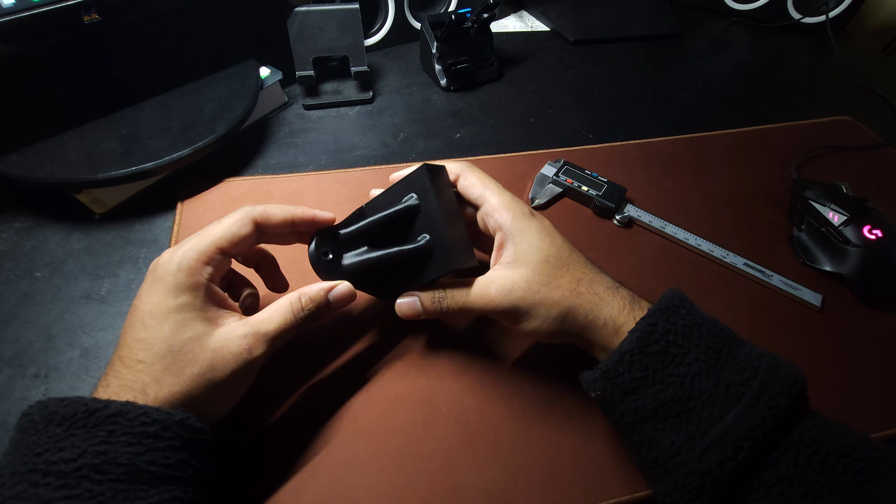Today I'm going to use Fusion 360 and Generative Design to make a really cool part, but a functional part, to hang my PS4 up on the wall since I'm getting back into story games again.

Because after I found out I was trash at OG Fortnite. Alright, I hope you guys really enjoyed that.

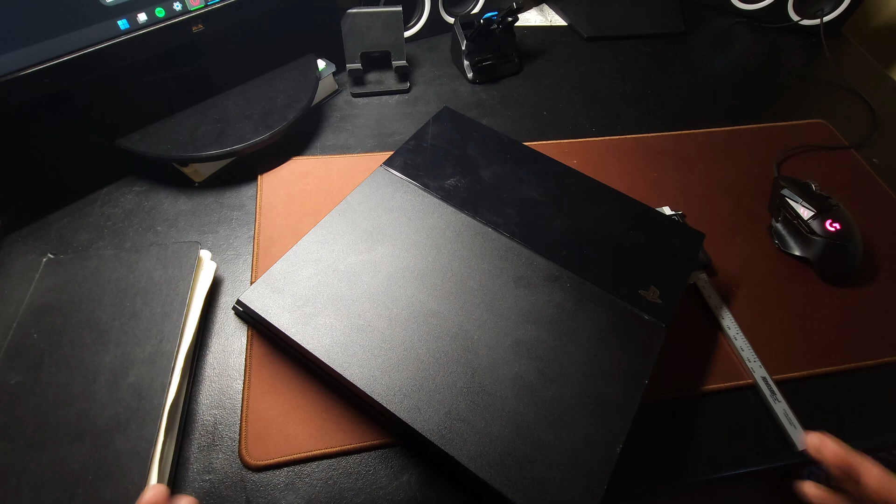Now let's dive in. Now when it comes to creating a part that depends on the features of another part, you're going to start by taking some measurements. That's going to be the most important part. So I highly recommend you guys take your time on this part, because if something fails, you're going to have to reprint stuff and you'll have to account for tolerances.

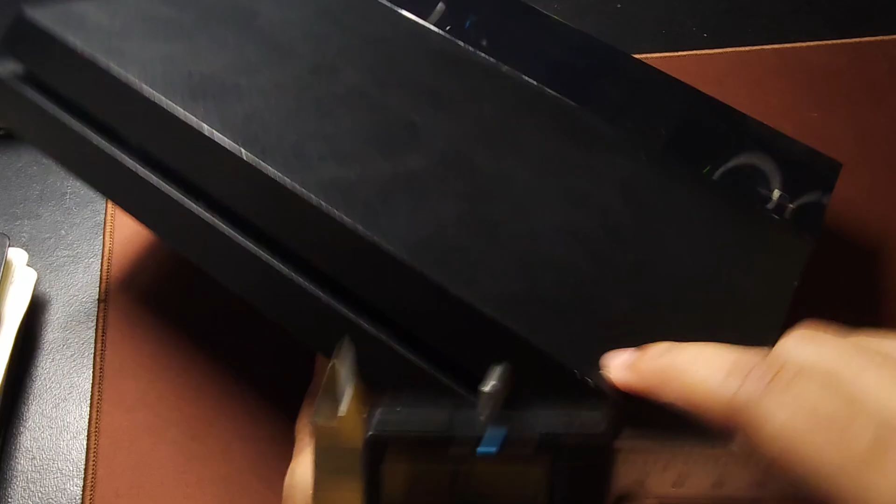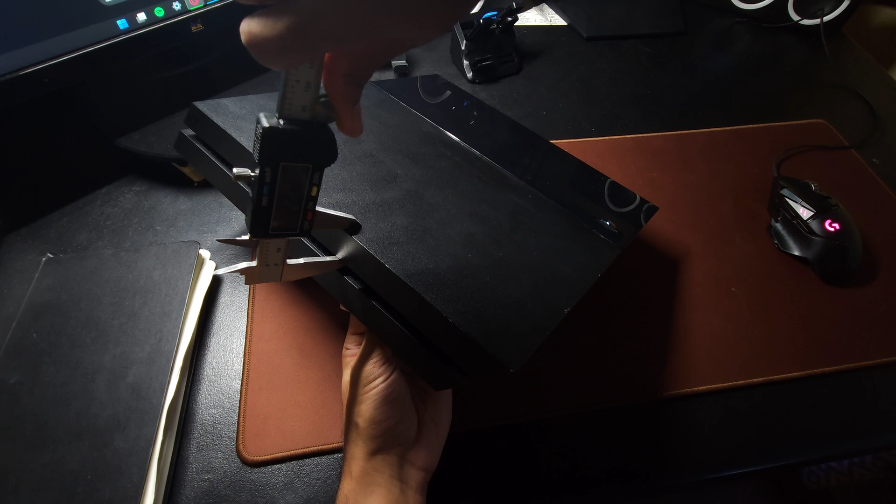So here's where I want my PS4 to be held on the wall, the slit over here. And we're going to start by taking the measurements of that with my calipers. Make sure you get a decently loose enough fit, not something that's like rock hard, but something that can slide in and out. So we got about 23.25.

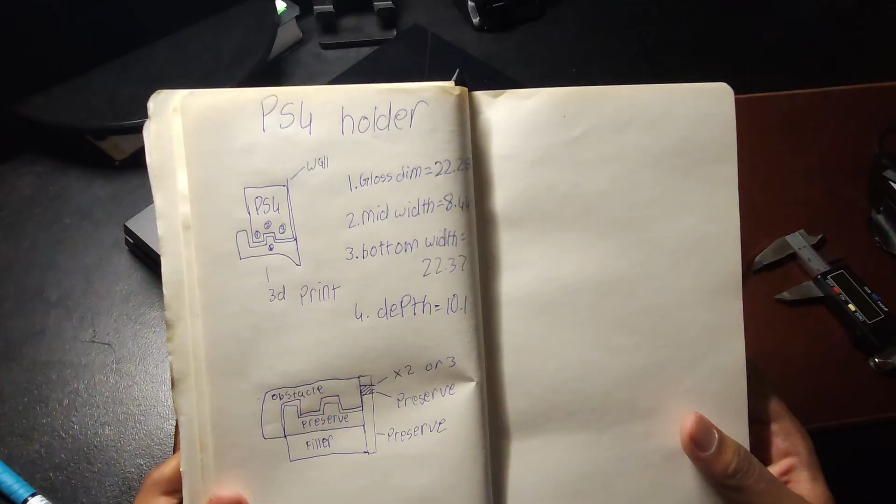The next thing you want to do is write down all of that in a book. Now I have written down all mine on my book already. Here's what I got. I got the 3 features of the PS4. So the upper area, the lower area, and the slot. Then you kind of plan out your features and how you want to do it.

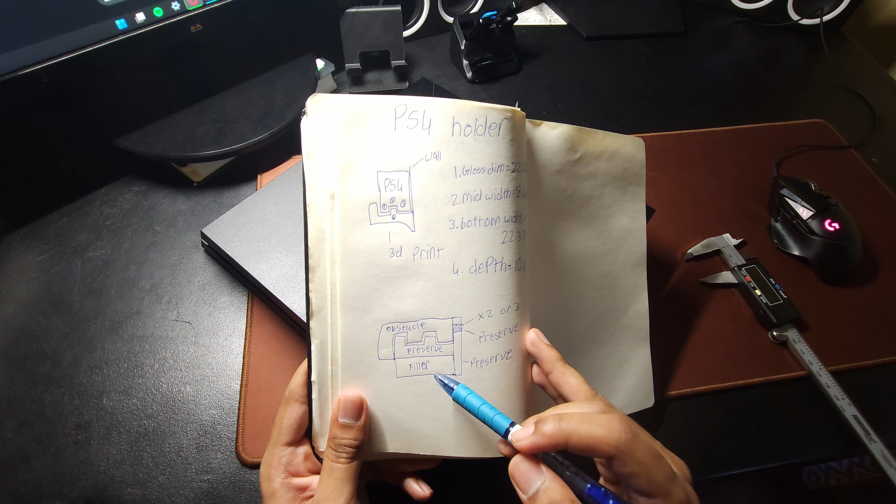For generative design, here's how I did it. We're going to create a preserved geometry here with our essential dimensions. And then we're going to create a filler geometry, which the generative design algorithm will then edit out to turn into the rib we want to make.

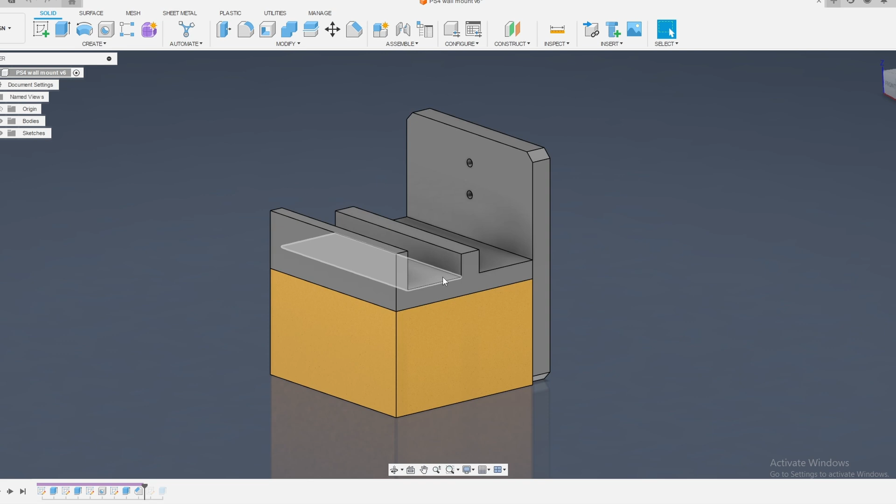Alright, so now we're in Fusion 360. What I've gone ahead and done here is created our backplate, and that contains our mounting holes and the rail, which contains all our essential measurements. So now basically I've created a functional component, but now we have this big block here, and I'll explain more about this later once we get to the generative design tab.

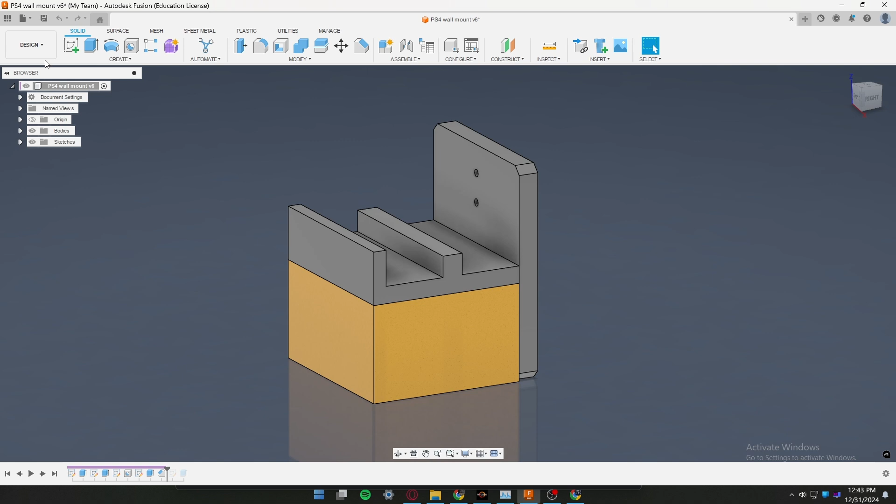But for now, I want you to think the point of generative design is that you go ahead and create the component in its bare bones with just the effective dimensions and the functionality of the part. And once that's done, we can go into generative design. Now you have 2 options here. You have the fluid path or the structural component, and we're going to be working with structural today.

If you've never been here, these new icons might be overwhelming, but Fusion's made it really easy by helping you work from left to right. So you guys can learn more about this tab over here or other YouTube tutorials. But here's a quick overview on what I did. We're going to start with preserve geometry.

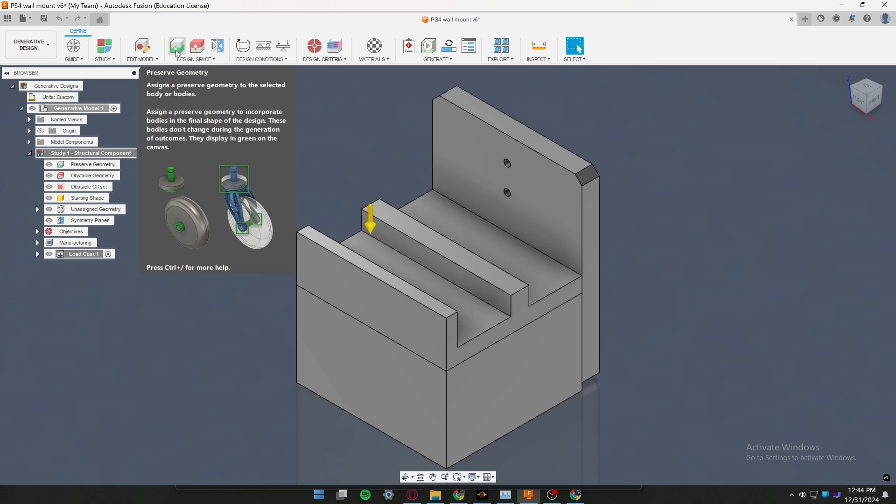Preserve geometry essentially means geometry that has to be preserved. Yeah, no shit, Sherlock. For example, here's our essential geometry that is necessary for the part to function, which is this rail and the back plate. So these 2 will not be modified during the design.

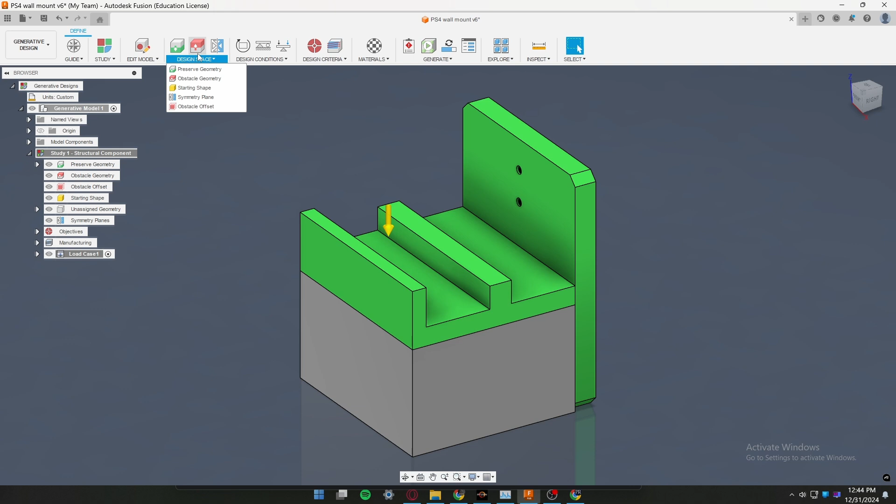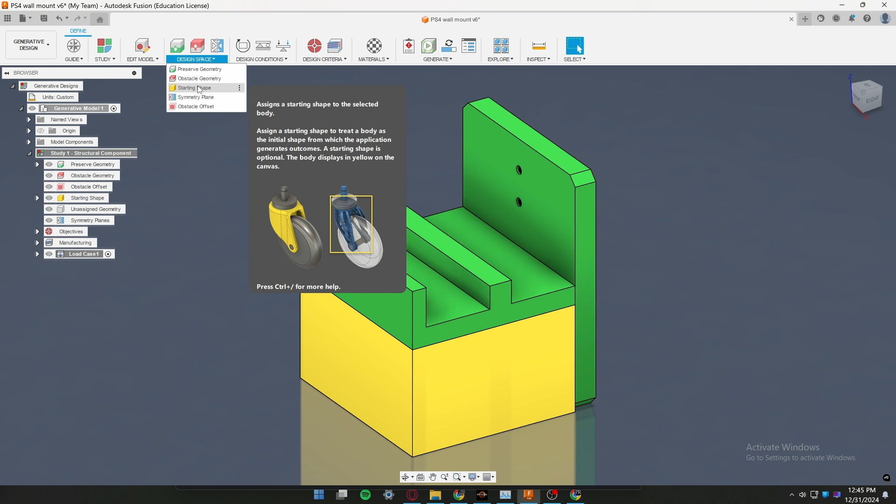So we give Fusion a starting shape, and Fusion can modify that starting shape based on the load case that is given. So over here, you'll see once we define our load case, Fusion's going to take that yellow box that we have and shrink it and modify it into the best organic shape that can support the load that's going to be sitting on our bracket.

This is going to save you a lot of time where you'd have to make this design manually, print it, put your PS4 on it, have it fall down on your head, and then go make another one that's maybe a bit stronger, or you overbuild it and you waste material on a component.

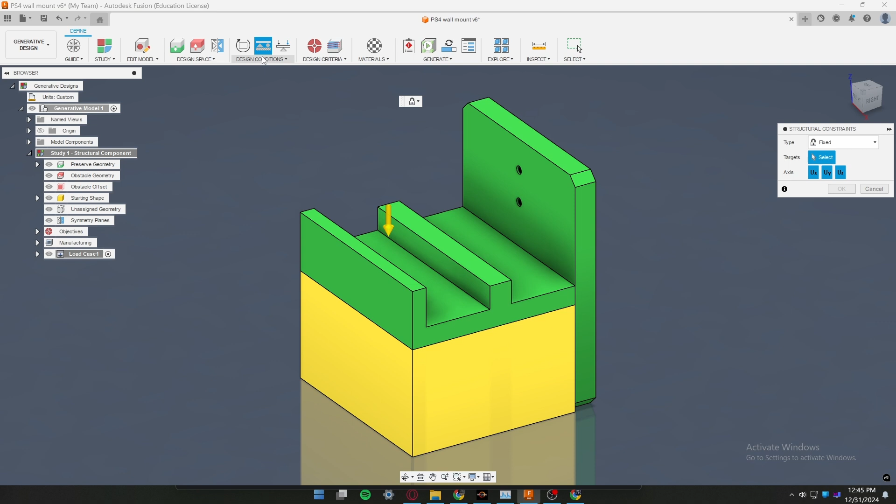So our next part is structural constraints. This is going to define where the object is fixed. So this wall bracket is where our object will be fixed, and from here the load cases are going to be acting downwards. So we're going to define our structural loads, and it's a Newton force. You can convert it if you want, but I prefer to use Newton force.

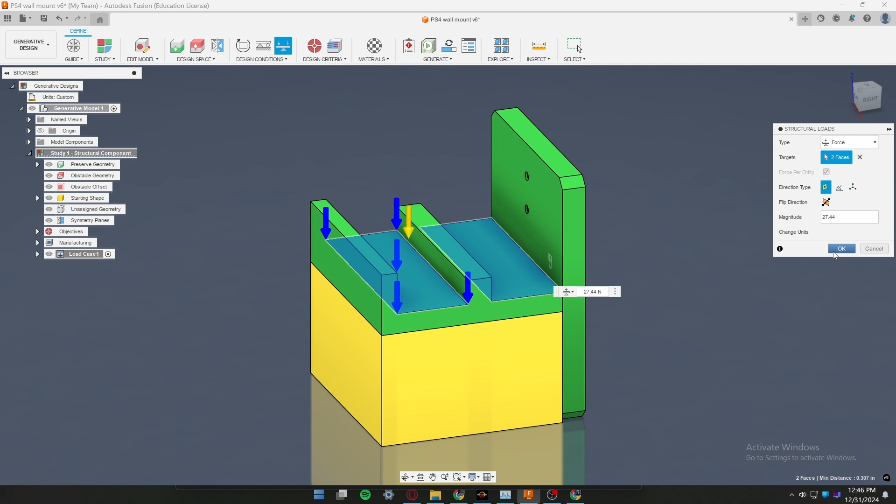And the way you calculate this is, I have it right up here. You could search up the weight of your object or measure it yourself. Mine is 2.8 kilograms. Then you plug it into ChatGPT, because other Newton calculators might not be using Earth gravity, so you might get funky numbers. I recommend just using ChatGPT, where you can define what you want, and it spits out this number. And that's about almost done.

Next is design criteria. Now this is also important. This defines how you're going to be manufacturing your components, so Fusion can better optimize the way your part is made, so it's easier to manufacture with that method. Now we're not going to be using CNC milling or any of these, but additive is 3D printing. That's what I'll be doing. And we'll be printing Y up. So that's our orientation, and that's correct.

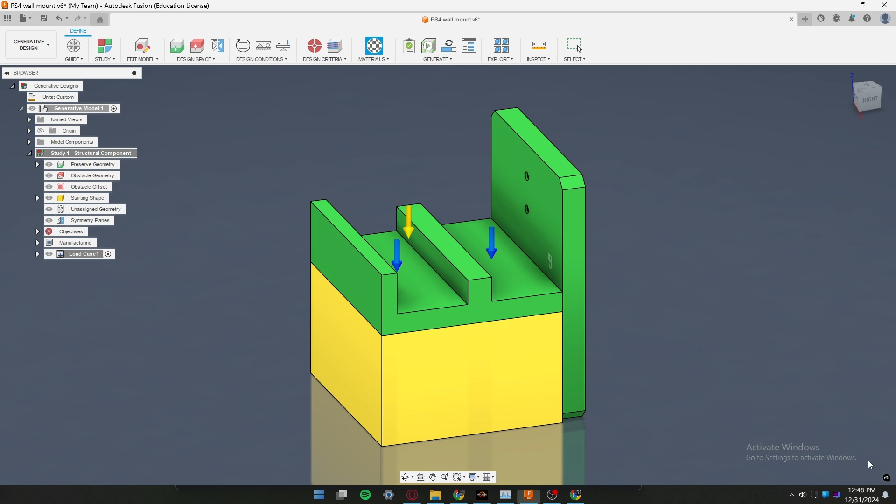And one more, study materials is also important. I'm going to go to my favorites where I have PLA. Okay, now that we have our study materials defined, we can go ahead and click generate. And also, I highly recommend you check the pre-check tab. This will give you all the warnings that you need to address in case your design is not ready for generate. So once we have a green check mark, we're ready to go.

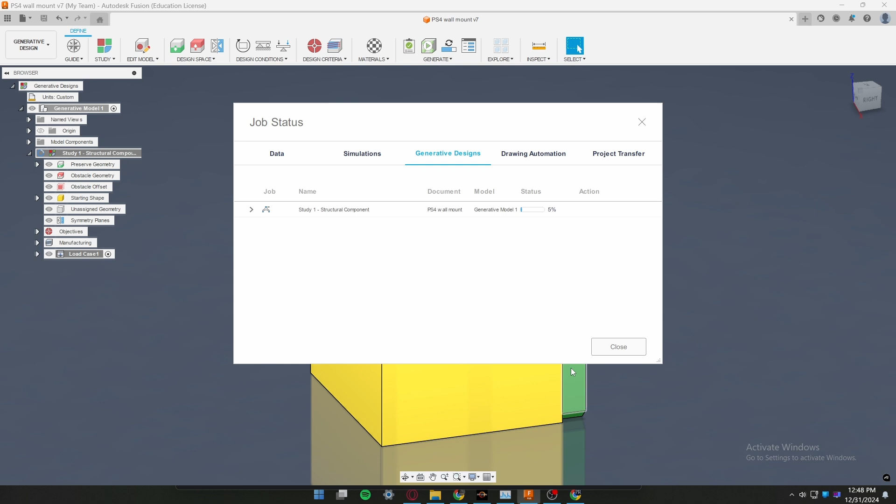And we can send this off to Fusion's servers. Now these crappy servers are going to take forever while your very powerful and capable computer sits idle. And we'll be back once it's done. And Fusion spits out 2 design options for you. Now, if you really don't want to go off the looks and actually want to go off logic and which to pick that is the safest component, you could use this little chart right here.

So when you click on a certain component, which is this one right now, you get up all these stats. And if you're not a structural engineer, you might not know most of these, but mainly you want to be looking at the safety factor number. Now, on average, to give you a perspective, engineers for structural loads such as buildings, I believe they aim for a safety factor of 2 to 3. So 184 is definitely way overbuilt and crazy. And we look at design 2 right here, it gets a safety factor of 94.

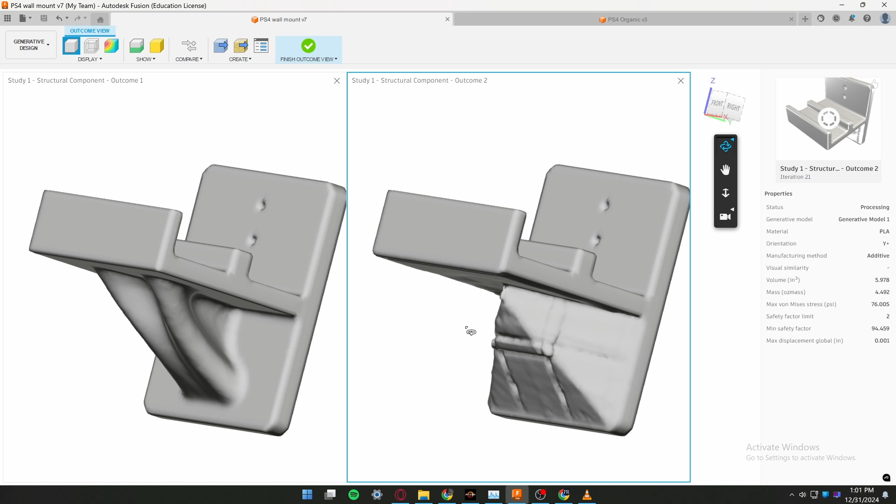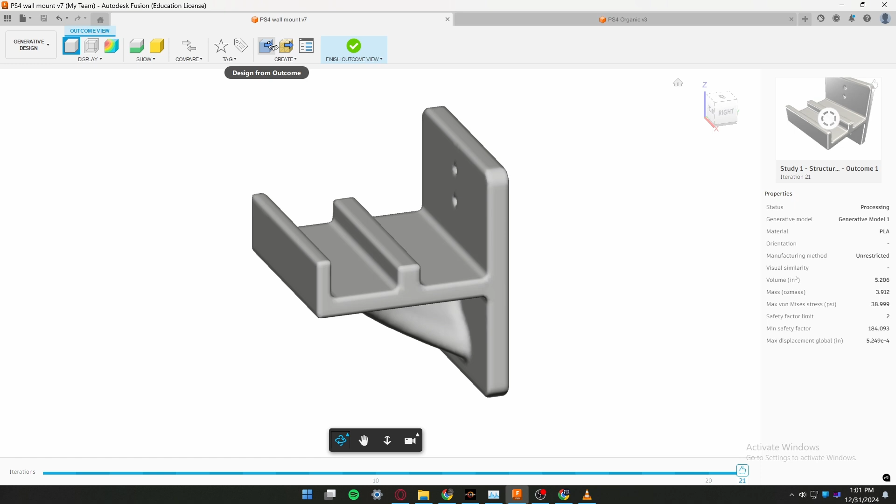So technically both of these designs can hold it, but this one obviously looks cooler, but when you think about 3D printing, this one also looks messier to 3D print, and there seems to be some problems with the bottom plate here. So we're going to definitely pick this one and finalize it. So once this is done, you can design from outcome. When you click this, this will take you into this tab with your design all done.

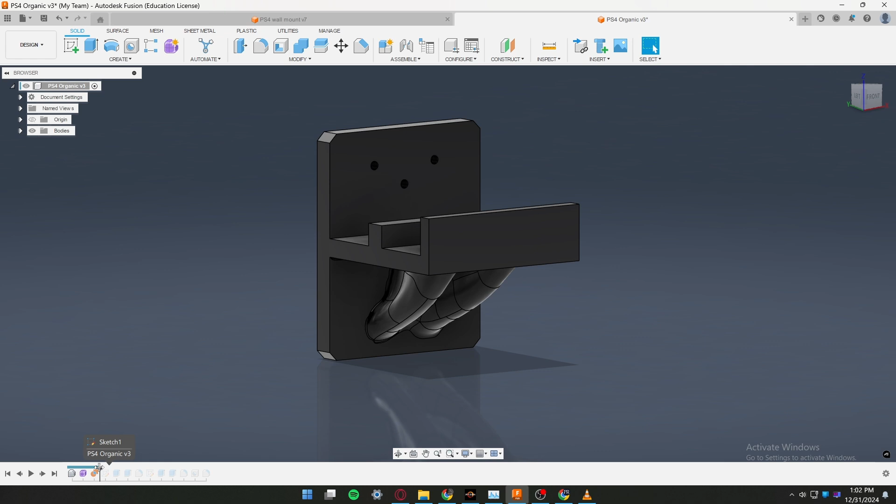Now this is a very much modified version of my design. When I got my design, it was like that. So this was my design. I added 3 extra holes, and then I realized it would be too crooked if I just screwed the whole thing on the top and had no support on the bottom. So I went through some more designing after that, and I took away some material, added 2 holes. Now this is my final design.

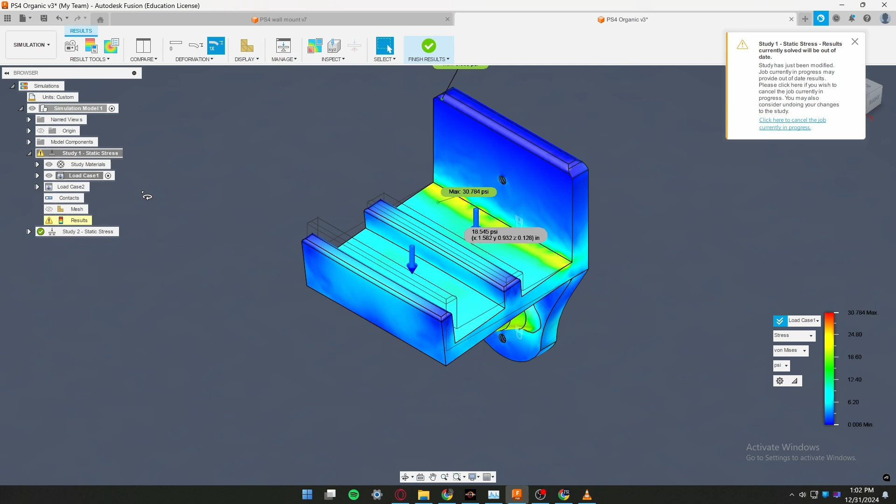And when you make drastic changes like this to your component after a generative design process, it's my mistake. I should have made this before. But if you do end up making it after, there's no problem. You could go to the simulation tab, and it's almost like generative design, but you could run a simulation test. I'll show you guys right now real quick. We're going to generate a new simulation study. We're going to click static stress because that's what we want. Now we have our thing. It's the same thing. We're going to work from left to right.

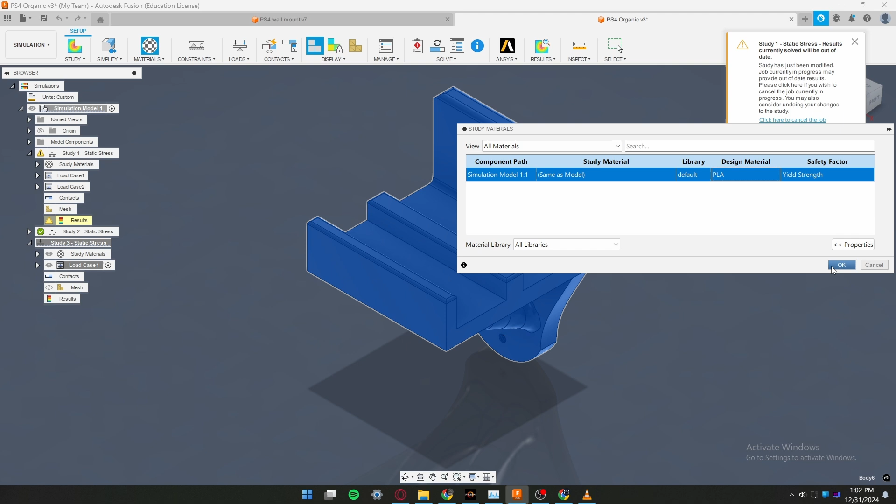So we're going to go to our materials, and our design material is already PLA. Then we're going to define our constraints, which is our back plate. And then our loads, which was 27.44. And that should be about it. This tab is much easier than the Generative Design tab. So once we check everything's ready, we can do another solve and sit back and watch a whole Netflix TV show while this is over.

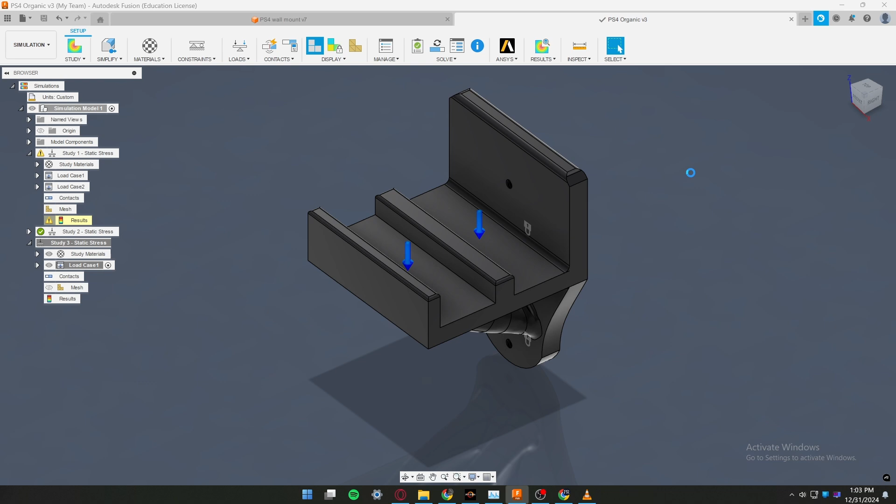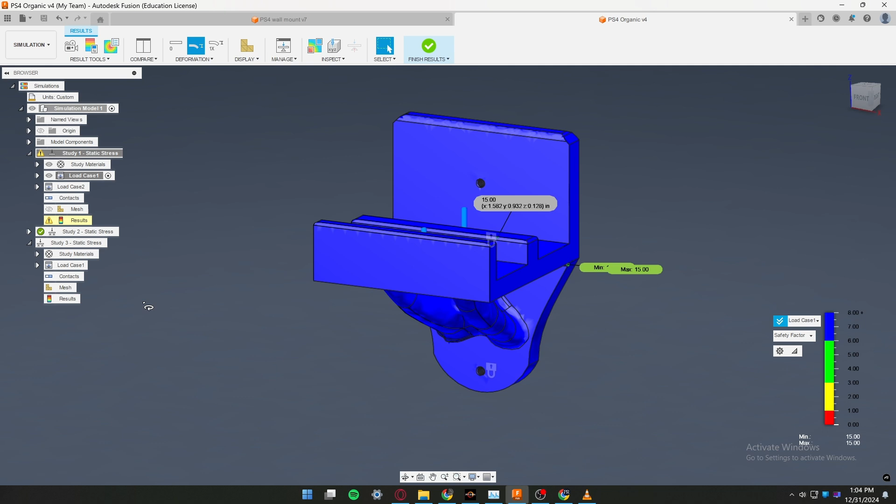Okay, so once we're back with our design, yours is mostly going to look like this with the safety factor chart. And as you can see, this is how a safety factor scale looks. The 2 to 3 range is where most of your design should always be if you want a decently built design. But we have exceeded the safety factor of 15, so this design is basically unbreakable when it comes to the load case that we have defined.

And to better observe this, we're going to switch to the stress tab. Now this should explain everything way better. This will teach you how to identify weak points in your design and where you may need to change some stuff, add some fillets or chamfers, spread the load, and maybe thicken up that specific area.

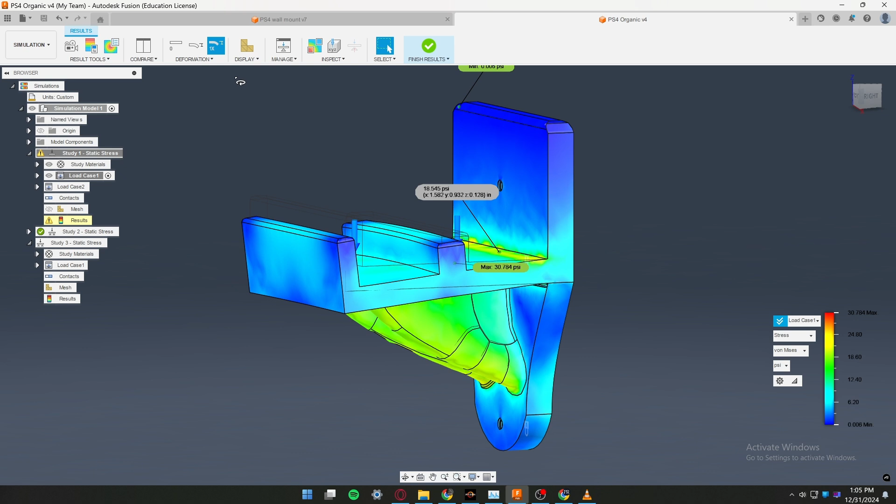Now your deformation scale is most likely going to be adjusted, and this is really not how your part will actually look when a load is applied. The adjusted scale is to help you visualize it better. You can go all the way up to 5x to make it look crazy, but when you click actual, the deformation is so unnoticeable, you can't really tell. So you use adjusted to help you visualize it better.

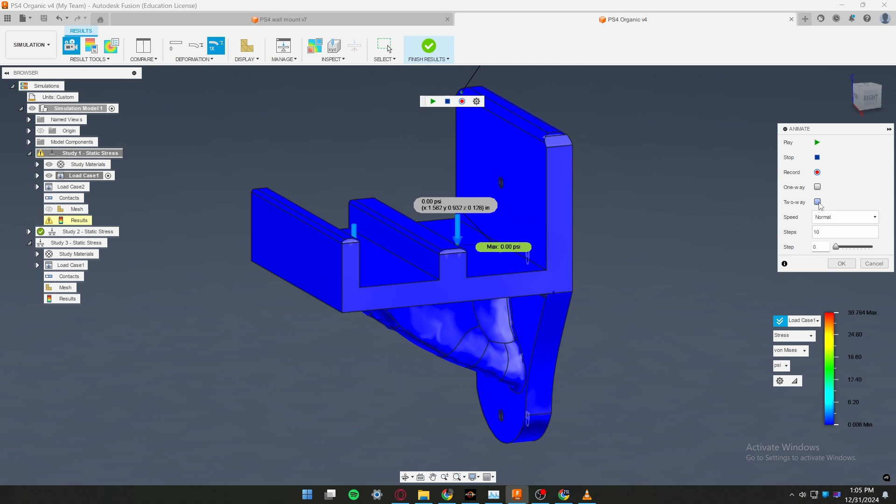And we can also animate that. There we go. When we animate this, it's super useful to see where areas of stress grow as a load is placed on the subject. So I identified that this seam over here gets a lot of stress when the object is placed on it. And it's actually not even crazy. You shouldn't even be worried about it if it's in the yellow range, so there's no problem really.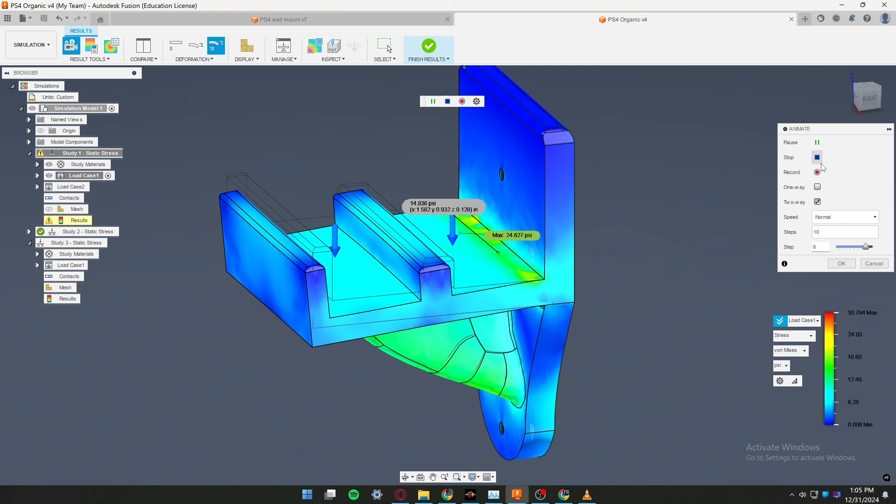But I did want to experiment with it, so I went ahead and added a chamfer or a fillet, and it turns out it actually made it worse. Our maximum pressure at this point became 40 from 30, I believe. Let me go back to this design. So yeah, our maximum pressure here was 30 psi, and after the fillet it was 40.

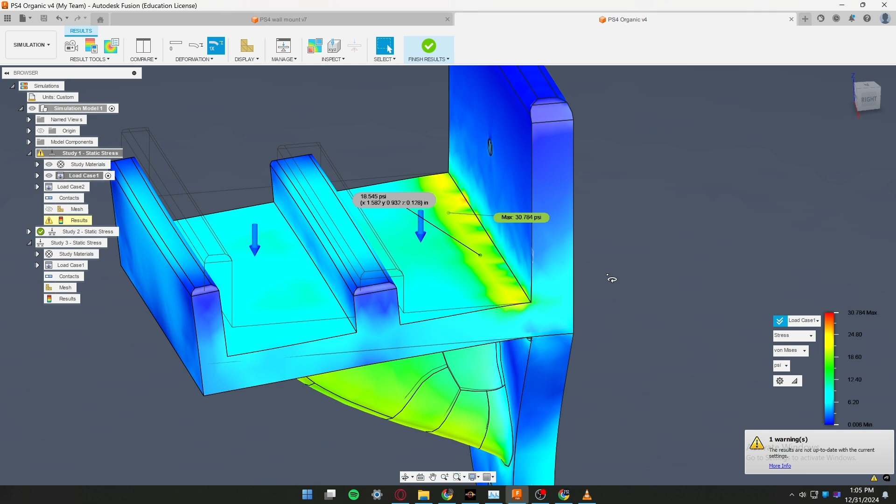So it was doing better with the original design, so I left it, and I confirmed everything's good and ready to go. I don't need to run any more generative design simulations to redo this bottom area. Everything's ready to go, so we click finish results and we can go ahead and 3D print this.

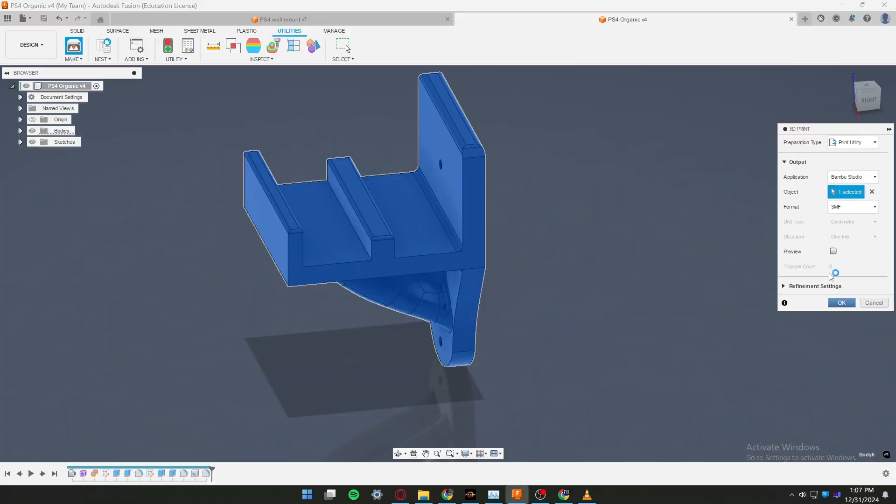Now we're here in Bambu Studio. Click auto orient and it's going to pick the best way to 3D print this. So this is our Y-up orientation that we had defined in the simulation. We're definitely going to need supports for these, so I'm going to set it to tree, auto, and I found tree organic uses the least amount of filament. Speed, I generally like to turn down to 50 on the initial layer, and everything else I leave as default. One skirt loop to get the filament flowing properly.

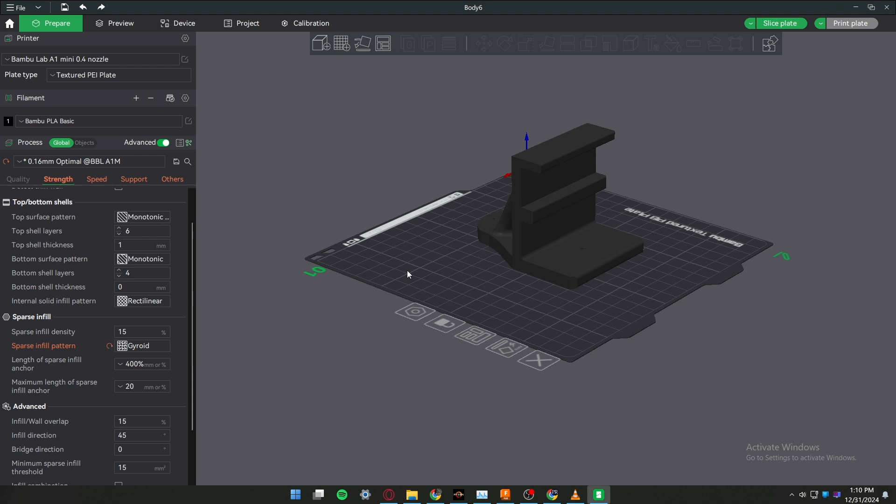And one more thing in strength: you want to use a gyroid infill. The gyroid is the best type of infill to provide strength in all directions. I'm going to go ahead and slice. Inspect the model, make sure everything's correct. So now we have our skirt loop, our supports, and our design is going to print perfectly.

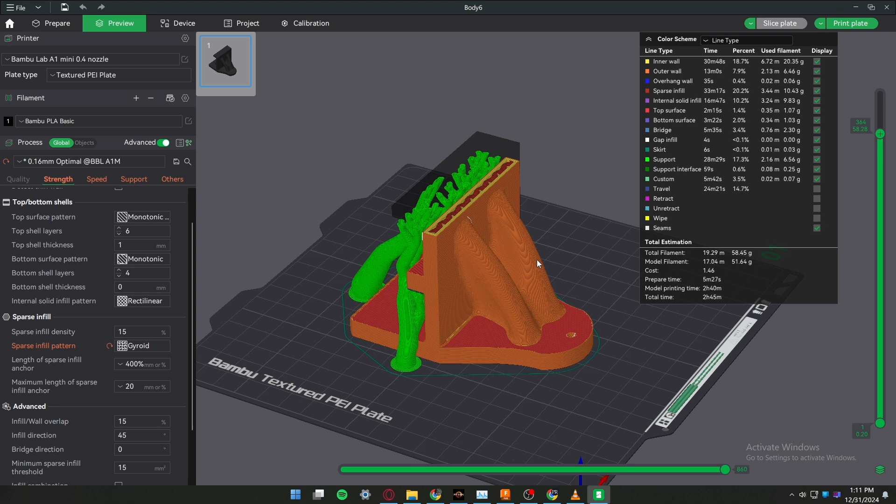Now when you have organic shapes like these, you really want to print them Z up. It's going to make it way easier for your print and it's going to look nicer. If you print them with supports or any other way, it's going to look jagged and just very bad. With all that done, we can click print plate and send it off to our printer.